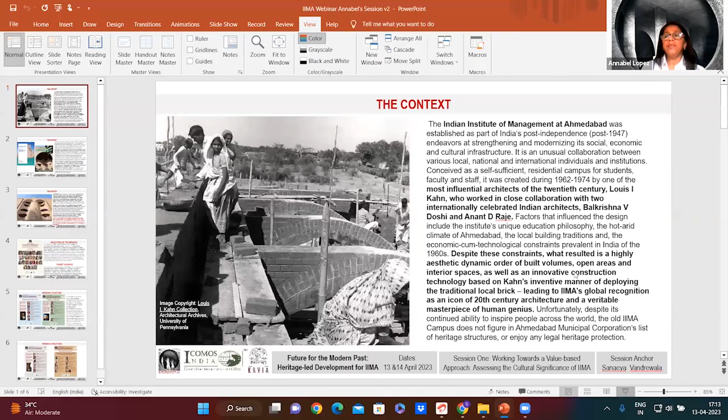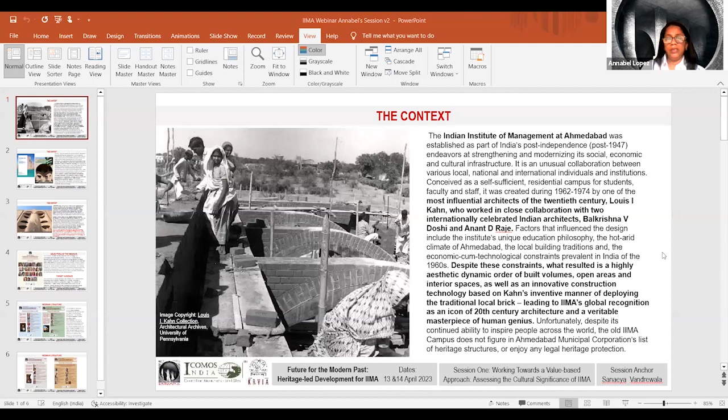First, just a little bit about IIM Ahmedabad. The Indian Institute of Management at Ahmedabad was established as part of India's post-independence endeavors at strengthening and modernizing its social, economic, and cultural infrastructure. It was designed from 1962 to 1974 by one of the most influential architects of the 20th century, Louis Kahn, who worked in close collaboration with two celebrated Indian architects, B.V. Doshi and Anant Raje. Despite the multiple constraints they faced, IIM Ahmedabad today is recognized as an icon of 20th century architecture and is a veritable masterpiece of human genius.

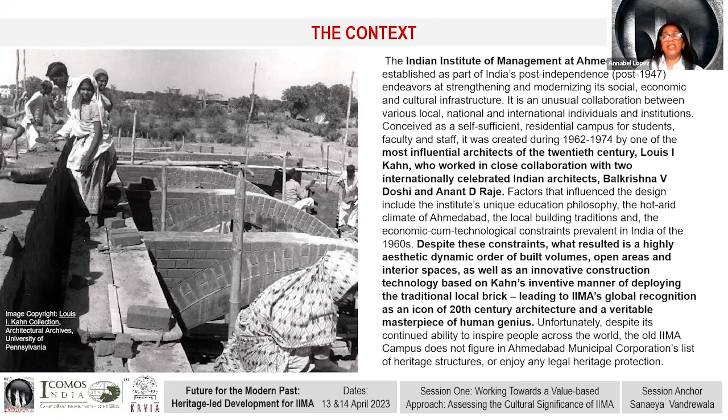However, despite this iconic status, the campus, unfortunately, is not legally protected as heritage. Over the years, the old exposed brick, in fact the reinforced brick buildings, have begun to show signs of decay. A conservation and rehabilitation program, which was taken up by the management in 2016, was abandoned sometime in 2020.

When the IIM authorities decided to demolish and replace most of the 14 dormitories with new student housing, ICOMOS, alarmed by this development, issued a worldwide heritage alert, prepared by ISC20C ICOMOS India, to ask for the preparation of a comprehensive conservation management plan for the campus. There were a number of protests from across the world, and finally, on January 1st, 2021, IIMA announced that the demolition plans were deferred.

However, in November 2022, IIM was again in the news when the Board of Governors announced that it had decided not to continue with any further restoration work, opting instead for a reconstruction of the faculty blocks, the classroom complex, and 3 peripheral dorms, with the same exterior facade, a seismically safe structure, and major renovation of the internal space to improve its functionality and to suit the needs of the current users.

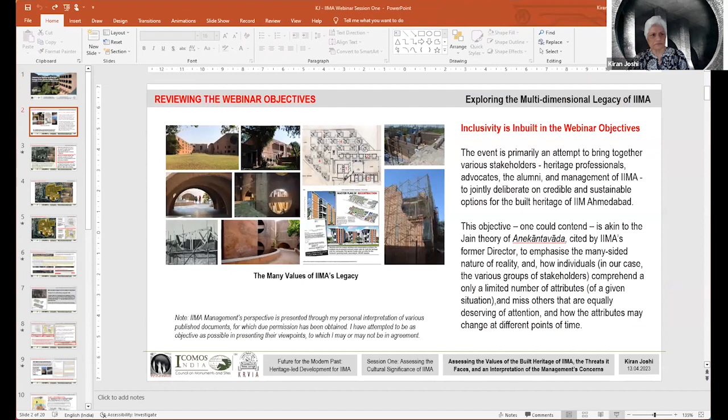To continue with what Annabel talked about, that is the objectives of the webinar. As she's already explained, inclusivity is inbuilt into the whole event. That is how we started. So the event is primarily an attempt to bring together various stakeholders, heritage professionals, advocates, and so on and so forth. But unfortunately for us, despite repeated requests, we did not get any response from the current director of the IIMA.

Errol D'Souza did respond and has very kindly agreed that I present my own interpretation of whatever writings have been put forth by him and sometimes the Board of Governors of the IIM. One of the things I want to point out here is his famous 34-page tract, as he calls it, where he refers to the Jain theory of Anekantavada, which essentially means that every object, every situation has a number of realities, and you cannot just view something from only one angle, so everybody has to get together. I only wanted to point out that the objective of our webinar is very close to what he's trying to promote, that it's very important that everybody gets together, a number of stakeholders offering a variety of viewpoints, sometimes opposing, sometimes conflicting, but it is important that they get together to resolve a difficult situation.

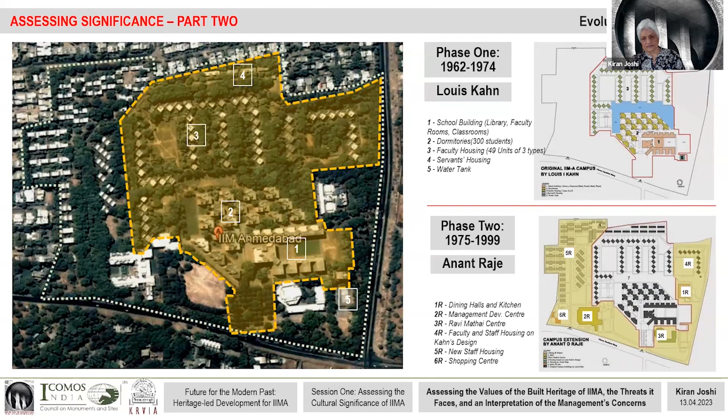The campus, as you know, is generally said to have two components. One is the old campus, designed and built by Louis Kahn during his lifetime. The second part, marked in yellow here, is whatever was built after Kahn's death, between 1975 and 99, under the leadership of Anant Raje.

When we talk about issues of origin and growth, the institute is growing, and in that process certain buildings were demolished. This story goes back to 2019, four years ago. Some of this housing, as you can see in this image, was demolished, and a British architect tweeted about it.

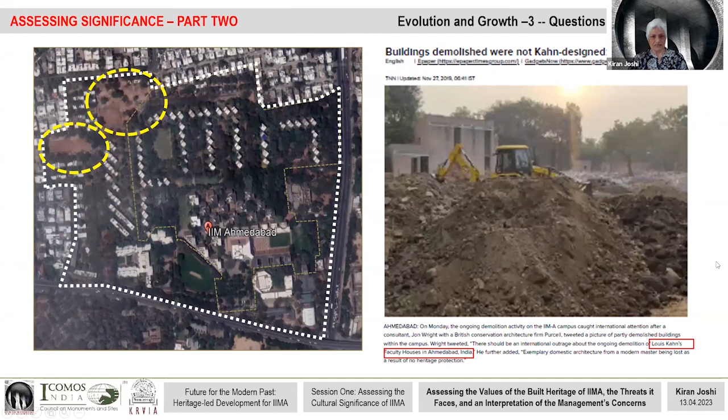He reported an ongoing demolition of Louis Kahn's faculty housing in Ahmedabad. The statement was contradicted by IIM, specifically Professor Errol D'Souza, who said the buildings demolished were not designed by Louis Kahn, but came much later.

So this raises some of our questions. Does the major significance of the IIM rest primarily on its association with Louis Kahn, or are there other ways of looking at it? When we started this webinar, there was lots of discussion of whether we should be looking only at Kahn's work, or also that of Raje. But is that enough? Do we need to look beyond that as well?

That is, the Louis Kahn school building and the student dormitories. As you can see in the plan here, almost all of the remaining buildings of the campus were to be demolished and removed. So this is the area which was built during Kahn's lifetime.

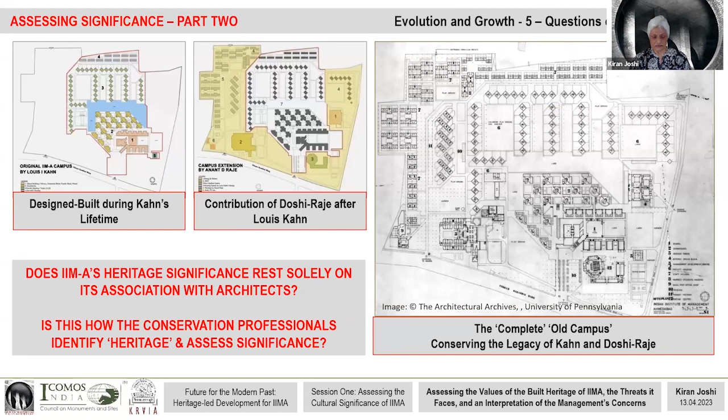Related to this is the question asked by Errol D'Souza in his tract. He says it is pertinent to raise the question: who is the author of the first building? The premise, of course, is based on the fact that it is only the architect, the value of the architect, or how famous the architect is.

That is the only thing which will decide whether or not the campus is significant. And he draws our attention to the fact that it was not just Kahn, but Doshi as well as Raje and other local architects who worked equally on the project. Should then the legacy of the architecture of the building be attributed only to Kahn?

Going on with this, we come to the present year, 2023, and find this question of identity and significance acquires even greater complexity. In this tract, right on the first page, the first section is on the identity of the object. Errol D'Souza traces how buildings have been changed with time, how many parts had to be replaced on account of becoming unserviceable or decaying. There is a huge description of that.

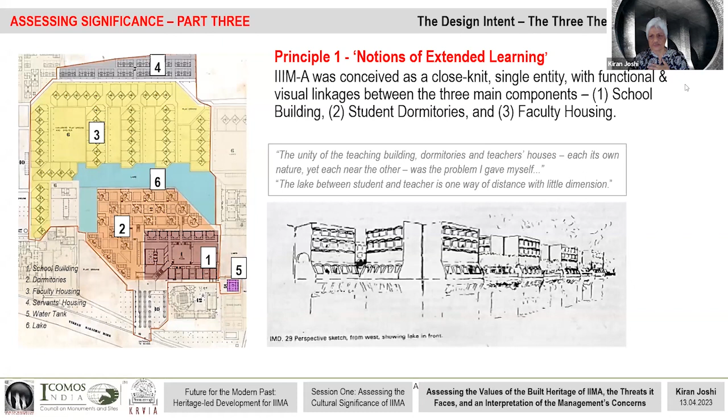The first principle is what he calls the notion of extended learning - that all parts, the student dormitories and the teaching blocks, are linked through a series of corridors, arched corridors, and landscapes. The idea being that students, with the kind of education system promoted at IIMA, would take the dialogue into non-academic spaces as well.

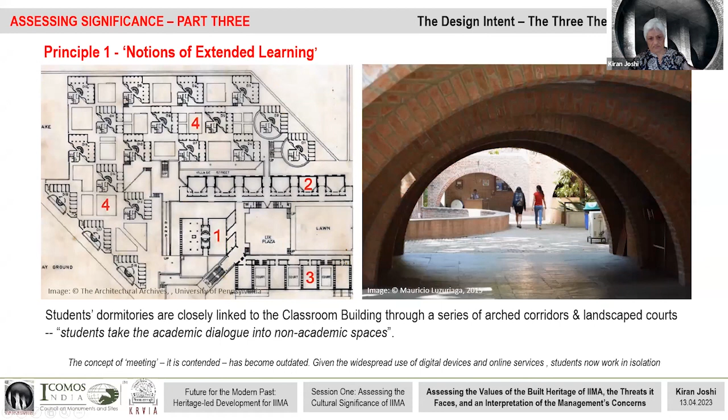However, what I've given below is my conclusion or interpretation of what Errol D'Souza feels about it. He contends that the concept of meeting has become outdated, and therefore the design intent has kind of lost its relevance. Given the widespread use of digital devices and so on, students now prefer to work in isolation.

So the whole idea of meeting and community spaces, to him, while justifying the demolition of this, has been kind of pronounced. The second important thematic principle was that of climate sensibility. The design is based on correct orientation as a response to prevailing sun, heat, wind, light, rain, dust, etc., all of which became the basis for the underlying geometry of the site plan and building design. In fact, after the first site plan was made, a new one was devised to utilize the southwest sea breeze.

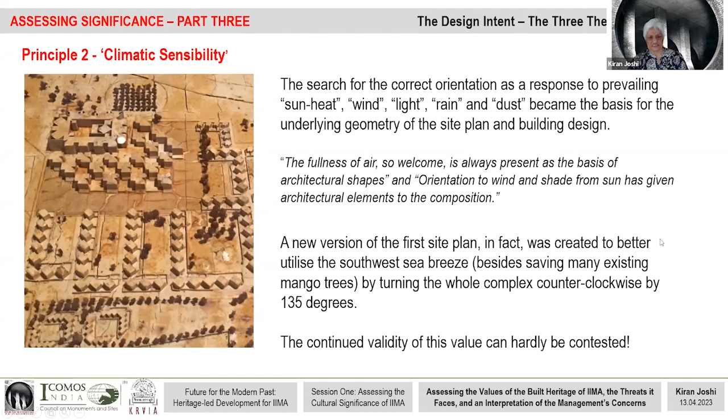The continued validity of this value can hardly be contested, especially today when we are talking about energy saving and sustainability and whatnot. I don't see anyone who could justify that students today prefer to use air conditioners, and therefore this plan is not required.

The third one, and to me the most important one, and the bone of contention, came into play a little after the project had begun. After a while, Kahn decided that instead of using concrete, he would engage only with the locally produced brick at a basic level, extending himself much beyond a mere adoption of the indigenous vocabulary, and invent a unique structural and visual grammar that is now recognized as being of outstanding value.

More would be talked about this by Amit, and much of what I've learned is through his thesis project - throughout the thesis dissertation, the PhD dissertation, throughout the project, we know that Kahn was to remain committed to a reassembly of these traditional components and aesthetics. Some images here show how Kahn's decision to build exclusively in brick generated a new vocabulary, how he reinterpreted tradition, and so on and so forth.

The humble handmade brick became the focal point of the entire thing. And ironically, this very unique attribute, and to me the most fascinating one, because it is less talked about than all the other attributes of this place, has also become its bane.

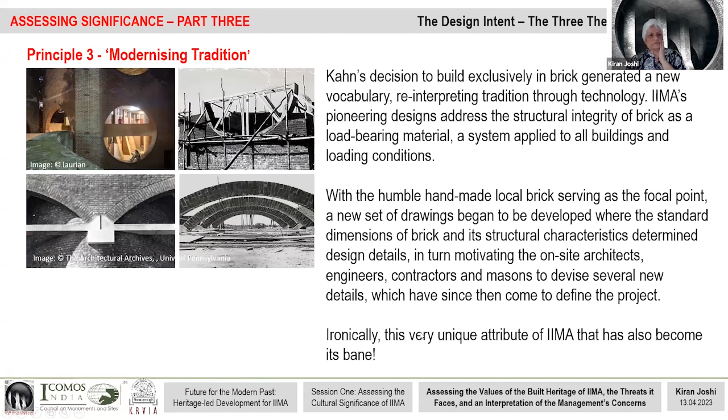A little bit on why I call it that - it's not exactly significance, maybe it is, kind of, and we are talking also about the threats that are posed. So the major cause of degradation, this is deduced not only from the conservation architects' reports, the reports submitted by IIT Roorkee, who were commissioned, and also from other sources.

The major causes are inherent defects in original material and construction techniques, which is considered very serious, and of course faulty repair methods and the lack of routine maintenance. The other signs of decay are rising damp, seepage of water, damaged pointing, absence of casing, and so on, which will be tackled later on as well, so I won't go into this in detail.

What is important here is that while the conservation efforts are reported to be largely satisfactory, the IIT Roorkee report also says that even the restored buildings have begun to show fresh areas of distress and decay. Since the inherent defects in the original material and techniques are quite serious, it seems, from the reports - one doesn't know - this is really a cause of concern. So the question I ask is: how does one contend with the decay of a seemingly unrepairable construction, but one that represents a major value of the built heritage of IIMA?

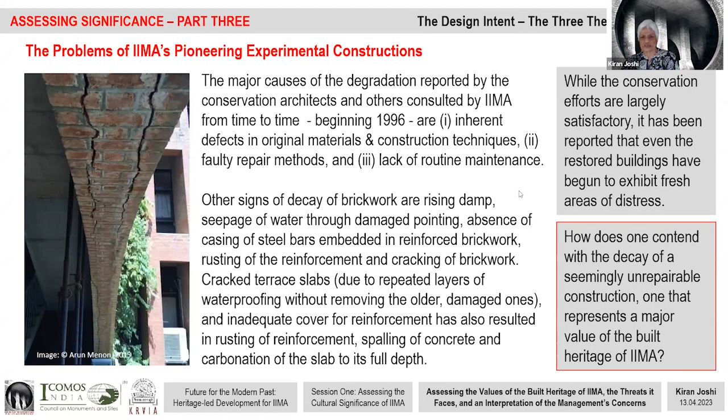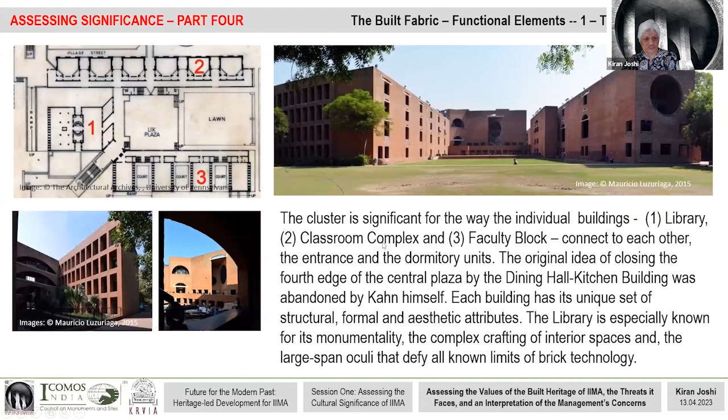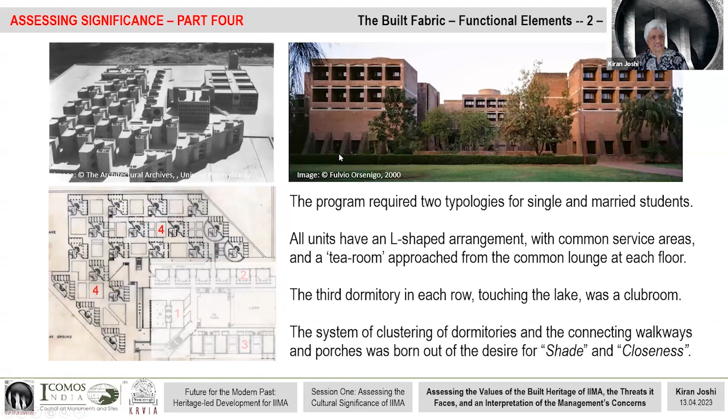Part 4 of assessing significance covers the functional elements of the building, three major elements: the classroom block comprising the library, classrooms, faculty block, etc., and its characteristics; second, the dormitories, admittedly the best part of the whole thing, and why a particular design was adopted, its significance, form, and the concept behind it; and finally, the faculty houses and staff houses, all sharing a plan based on the structural adequacy of brick, economy, and climate.

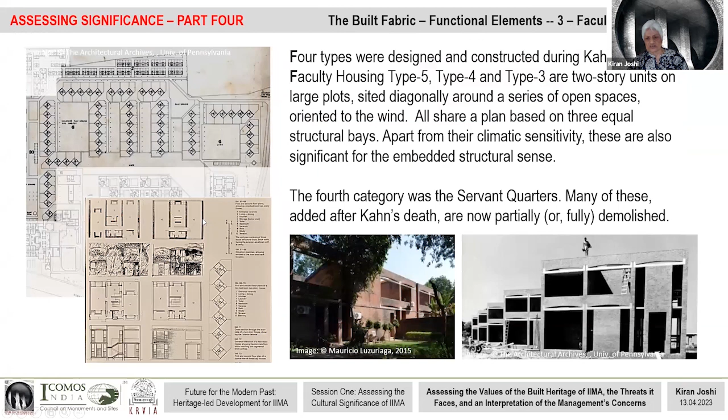Now I come to part 5, which has taken me much more time than anything else, because it meant going through all the documents I could find. Three minutes left, Kiran. Yeah, and this is the last slide.

So last but one: when we talk about the management's concerns, which I'm addressing on their behalf, I could only find three aspects. One was their concern for providing a safe environment for users, born out of the feeling that the residual life of the buildings is over, rehabilitation is not possible, and anything can fall and injure people. Therefore a building must be safe, provide a healthy work and stay environment, and be free from exposure to hazards.

The second is that the buildings have become functionally obsolete, and since they can't be upgraded, new buildings are needed to meet current living and learning standards. He also says he thinks conservation architects only talk about aesthetics and going back to the origin, but a building is a lived-in object, and it's incorrect to reduce it merely to its aesthetic and historical value. There is also a brief mention of shortage of land for further expansion, which to him justifies that existing buildings can be demolished.

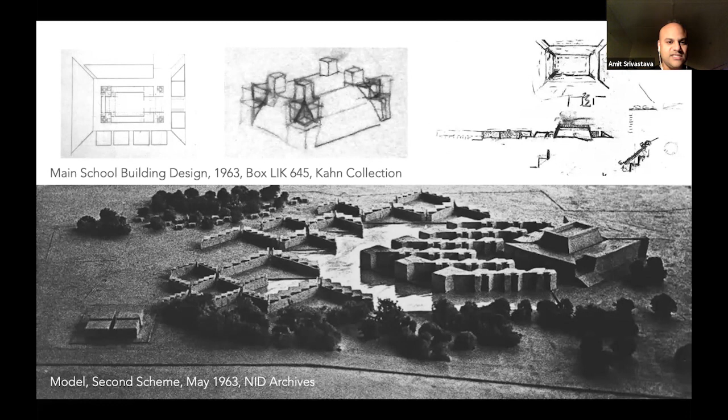It was not until the members from the NID team who actually went to Philadelphia in late 1963 that the transformation happens, and Louis Kahn sort of changes and accepts the fact that he's going to build in the local material of brick. So the agency of these people from the NID team is an important one to consider in the development of that.

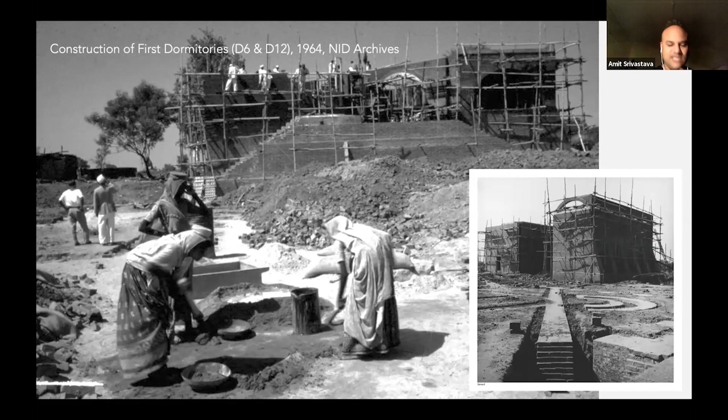In fact, when the construction began for the first dormitories in 1964, Louis Kahn was not in India, and these were done on the details that were developed by the NID team here.

I'm not going to get into detail of that, but it's an interesting one to see, because even today, if you go and look at the D6 and D12 dormitories, which were the first dormitories to build, you can see that the bonding pattern is different than the other dormitories. It sort of is a very important part of finding out that history of transition that happened within the development of the team, and the knowledge transfer that happened between Louis Kahn, Philadelphia office, and the development of the team at NID.

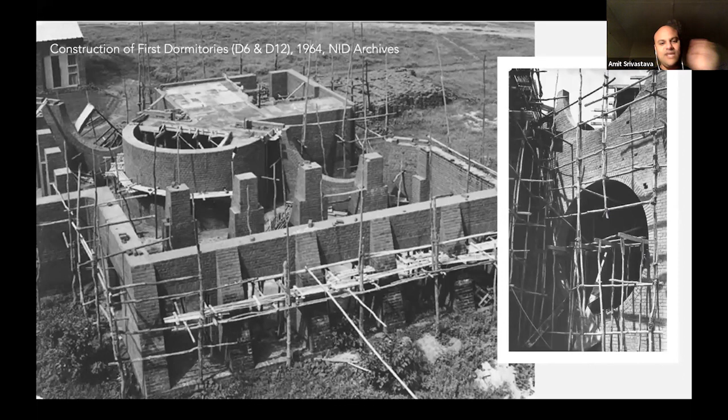And I particularly want to focus on this particular instance, which is in December 1964, Louis Kahn comes to Ahmedabad, and there's this entire discussion about the architectural construction process. And they are involved in the production of this thing, which was called the experimental arch. If you go down into the campus, this still exists.

And the whole idea was to go back to the basics and reconsider brick as a material, understand it not as an imposition of Louis Kahn's idea, but as something that was developing with the capacity of the masons, the bricklayers, the engineers on the site, everybody together.

And this is a very important thing to understand, that IIM in that sense is not just Louis Kahn's creation sitting in Ahmedabad, it's a creation of Ahmedabad, which is directed in certain ways by Louis Kahn. And it transfers the people of Ahmedabad, but also transfers the way Louis Kahn looks at architecture.

So from my perspective, this network of intangible heritage is important, because we're not just seeing this as an imposition of Louis Kahn's design. There's a whole lot of players involved, and all of them bring really important things to it.

I'm not going to get into detailed history, but here, for instance, the NID team is really important, with characters like Satsangi, Sen Kapadia, Narale, Padmakar Karve. They were all involved in developing a complete new drawing convention, unlike anything Kahn's Philadelphia office was doing, and different from what Doshi's office was doing. This entire process was developed in conversation with Louis Kahn, but it defined the way the project developed.

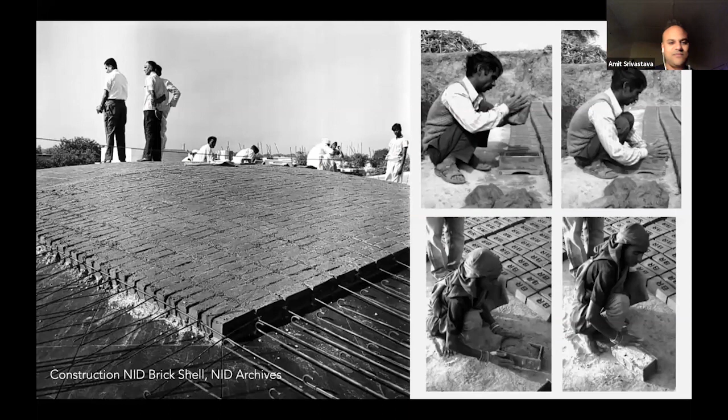And if you go today you can see this fabulous brick shell structure at NID, which was actually developed in collaboration with some of the same bricklayers who were working on the IIM project.

On the broader framework of Ahmedabad's development, if you look through the records of the Ahmedabad Brickmakers Association, 45 new brickmakers emerged in that 2 to 3 year period, with new kilns in Wadaj, Ghatlodia, Chandlodia, Bhat, all sorts of places. So it's a transformation of the entire city happening on the basis of this project—its roots extend all the way out throughout the building culture of Ahmedabad.

For my colleagues who might talk in the next session about the design legacy of Kahn, it's easy to see that after Kahn does this project and goes back, over the next couple of years he designs the Ayub Hospital, the Dominican Mother's House, the Fine Arts project in Fort Wayne. All of these have a direct reference to what he's been doing in Ahmedabad.

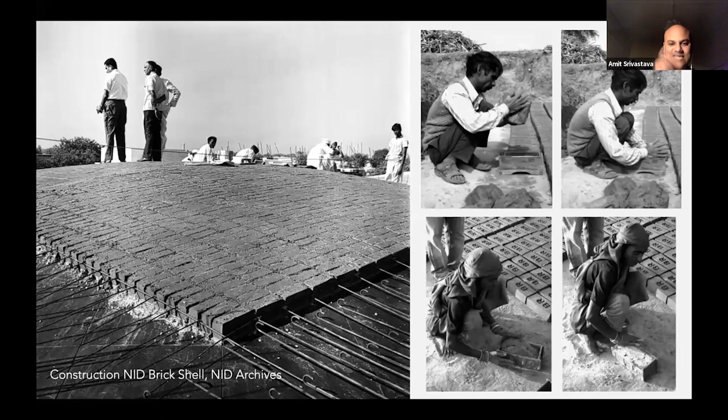The interesting thing is that for at least a couple of those projects, he sends the drawings to Ahmedabad for the NID team to look at and sort out the details before it's sent back. So not only is the impact happening on the building culture in Ahmedabad, it is also starting to affect Louis Kahn's future work.

As we are aware, the idea of looking at the IIM project is Louis Kahn working with the NID team and with people from Doshi's office to build a capacity, a way of thinking about materials of construction—but not in the sense that Louis Kahn is coming in and dictating that idea based on his own practice. He's coming in and developing that with the people here, which I think is important to consider in understanding how deeply this project is embedded into the building culture of Ahmedabad.

So getting to the issue of intangible heritage, the idea is that intangible heritage is both physical and associational. If you pay attention to the narratives through these stories and memories which we try to capture, there are invaluable insights into the psychological bonds that these people have with these places, and that also tends to define the heritage value. So in that sense, IIMA is not just the building structure itself, but the narrative that links it to Ahmedabad's building culture.

Speaking of narrative, there is a second really important implication of this project I want to highlight, and since I have limited time, I'm going to go through this quickly.

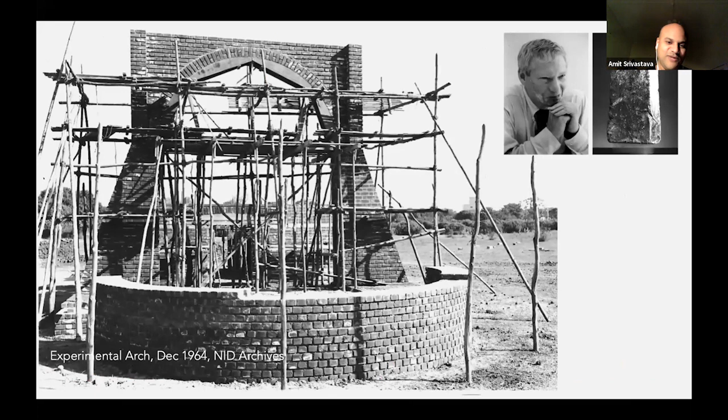Going back to the experimental arch, there's a very interesting, famous dialogue between Louis Kahn and the brick, familiar to anybody who's been in architecture school. Kahn asks the brick what it wants, and the brick, being recalcitrant, says, 'I want an arch,' even though Kahn wants to make a concrete lintel over it.

People have used this within architectural education for many years as a metaphor to understand how we use materials. But over time we've recognized that Kahn was communicating something else about the entire construction and building process. This idea of the recalcitrant object is an argument against hylomorphism, a way of thinking about how we deal with objects in construction.

Interestingly, in the same year that Louis Kahn supposedly has this dialogue with the brick, Gilbert Simondon is writing about the same idea against hylomorphism in his book, and he also talks about brick making and bricklaying as a way of understanding this relationship with the object world.

It's not until the 1990s that people like Bruno Latour start arguing that there is an agency of the material that is revealed in the process of making, and he starts talking about reinstating that symmetry of humans and non-humans.

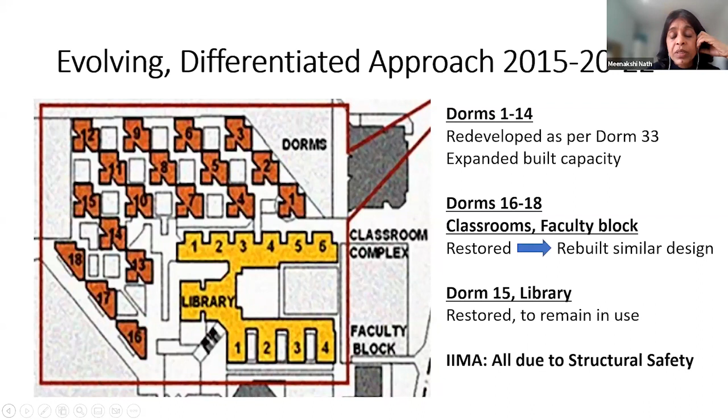This is where I think the differential values come in, because external facing, we all alumni love iconic Louis Kahn Plaza for the venue it offers our grand events like conventions, etc. But actually what links us to each other and back to the campus is the dormitories. People will come to reunions if dorm mates are coming and won't come if they're not.

These are the people who have linked us to better careers, linked us in life, given us friendship. So even at a reunion as recently as December, a 10-year reunion, around 60-70% of the people who turned up were from the old campus and only 30% from the new campus, even though roughly similar numbers of students study in both.

So we value both the inner core as well as the external facing. And actually, so do new students, the current students, and Rashmi is going to talk about that in her presentation. The other differentiation is functional benefits, like toilets, etc., whereas students value the inspiring architecture, because Rashmi and I had done a survey of 103 students in 2021, and she's going to talk about it.

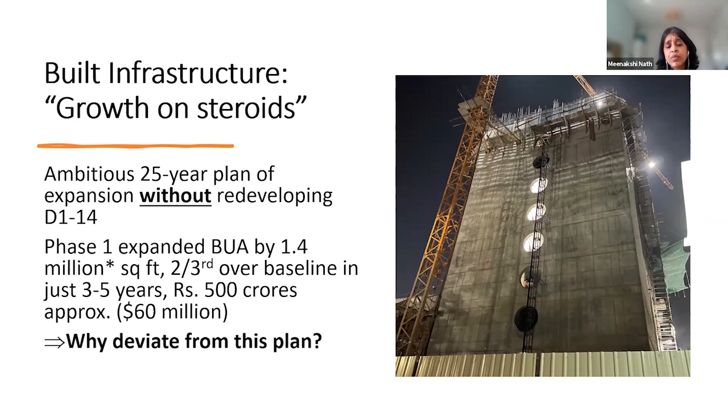Just to give you context on what's happening on the built infrastructure side in Ahmedabad, most of you are aware that HCP Design was the master architect for IIMA, and they've made a 25-year plan of very ambitious expansion, going from 1,000 to 2,000 students without actually redeveloping Dorm 1 to 14. So why do we have to do it? Why are we deviating from this plan, which has already delivered 1.4 million square feet additional in just one phase, and 4 phases still remain?

Now, just a very small point on IIMA governance. It's autonomous, which is great, but the governing council has nominees that are selected by the governing council themselves. So it's self-selecting, and they're not really representatives of the alumni or faculty. There are limited mechanisms, even though they're government owned, to be held accountable, really, because they're autonomous. They do come under the Right to Information Act, so eventually all the information that underpins these decisions will come out. It's really very important upon IIMA, as a custodian of this architecture, to be really scrupulous and very transparent in its decision making.

I'm not going to talk about this, and our submissions are that it's an irrevocable loss. Dorms are integral to our pedagogical philosophy, which is focused on group work, case work, etc. And students are valuing the inspiring role that the architecture is playing in their residential experience there.

Alumni can bring in a lot of expertise. Usually, institutions look at alumni mainly for funds, but actually as management experts, civil engineers who are also MBAs, we can bring in a lot of expertise. There's a lot of convening value. So please use us.

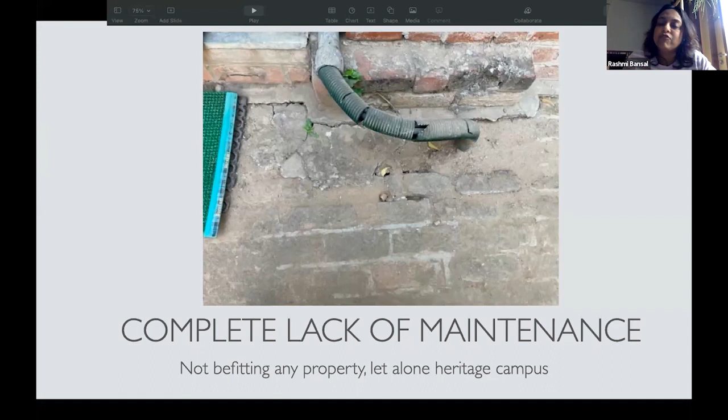But as such, the structure looked pretty wonderfully strong, and it didn't feel any different from what we experienced 3 decades ago. But we did want to speak to the students and ask their views, like do they really want these OYO room kind of hostels now, because we were told that that's what students want.

They're paying so much money and that's what they deserve, because apparently in ISB that's the kind of housing they get, and that's the need of the hour, there's a demand from the students. So we did go and speak to more than 100 students.

First of all, we went to dorm 15 and spoke to the students there, because that was the one dormitory which was completely renovated. And the students said that actually we're really happy with the renovation. And of course, yes, we do have shared bathrooms, but they're good and we don't have any problem with that, and we're satisfied with the whole experience. So that was something very heartening.

I think 60% of the students said, look, maybe it might be nicer with attached bathrooms, but if that's going to come at the cost of demolishing the entire old campus, then no, we don't want that. If I had to sum up more than 100 responses, they said the work done by Louis Kahn is amazing and so unique and important to IIM Ahmedabad, we should not demolish it. All we are asking for is better facilities, like air conditioners.

It is very possible to retrofit these dorms with air conditioning. In fact, dorm 15, when it was renovated, had a provision for adding an air conditioner. All over the world there are buildings 200, 300 years old that are upgraded and renovated with heating and modern plumbing. So it's not that it cannot be done, and that provision was made in dorm 15. So I think it's very wrong to say students are demanding this and therefore we are making this decision.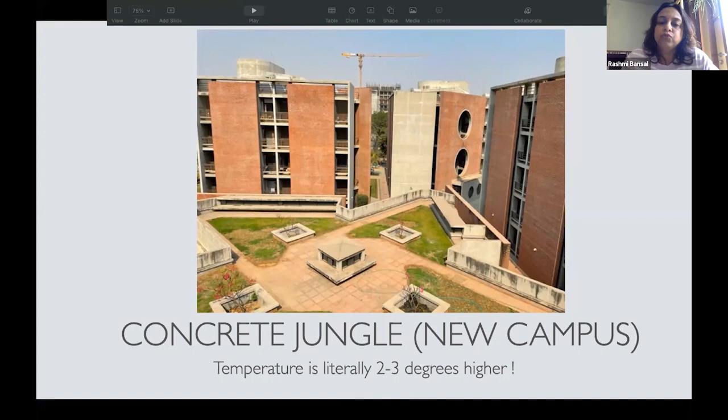This was just not possible in the old dorms. Your identity was linked with your dorm. Even today people say, I'm from dorm 13, I'm from dorm 14, and we find that kind of strong bonding with the dorms. I agree times have changed, people are more online, chatting, on text. But as educators, our responsibility is to design spaces which create more interaction, because apart from what you learn and the degree you carry, it's the network and bonding with fellow students that is the most important asset to gain from this 2-year experience at IIM Ahmedabad.

In the passageway that links the old and new campus, there's a nice poster with a quote by Louis Kahn, with his picture, saying he wanted to create unity between the teaching building, dormitories, and teachers' houses - the problem he gave himself to solve. But it looks like this whole concept of unity doesn't seem to matter anymore to the current dispensation.

In that case, the only thing we'll be left with is these kinds of posters, and instead of having living history, we'll just have memories on paper that there used to be this space and now it doesn't exist anymore, which would be a real shame. We do think as alumni that where there is a will, there is a way, and the Louis Kahn designed campus should be restored as a whole - that should be the goal, not piecemeal, keeping just the LK Plaza because it's good for convocation photos. Because once we remove the dorms and put some other ugly structure there, most likely like dorm 33, it's going to have no unity, no meaning. They may as well just remove everything.

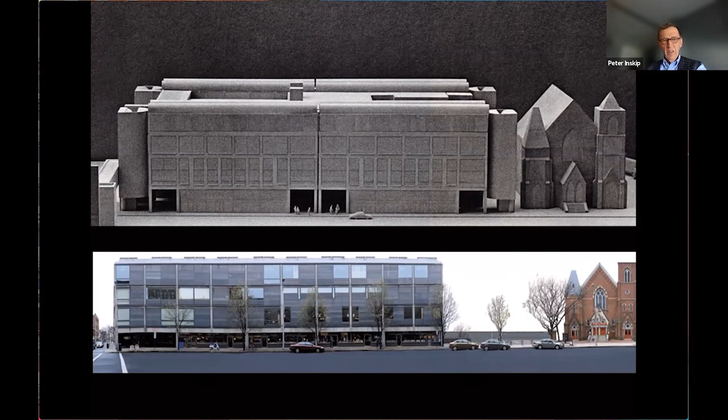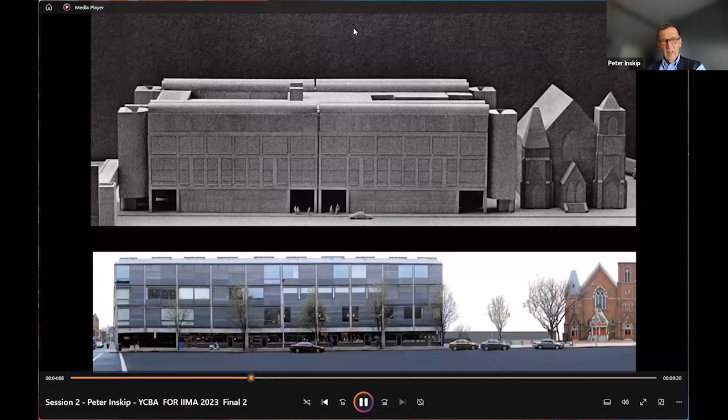However, it was too ambitious, and Mr. Mellon's lawyer was clear that it was beyond the available resources. The revised project was more modest and pulled back the building, disengaging the church with a new external lower court.

The building was structured around two courts, set deep in the plan. The portico cut through the commercial band that faced the streets, opening to the quadruple height entrance court. Steel panels demarcate the rear of the outward-facing shops. Oak millwork screens house the three floors of galleries above, and openings allow views onto those exhibition spaces.

The library court rises from the second floor, its blind millwork walls screening the study rooms and rare book libraries, but opening on the top floor to the top-lit galleries that extend over the whole of the fourth floor. The hanging of the two large paintings by Stubbs is suggested in some of Kahn's sketches, but generally paintings were not destined to be site-specific.

The approach, however, was definitely sympathetic to Mellon's idea of the English country house. In the galleries, materials are all neutral: poured concrete, travertine, oak millwork, Hessian, and natural wool carpets. Views over the entrance court to other galleries located the visitor within the building and countered museum fatigue.

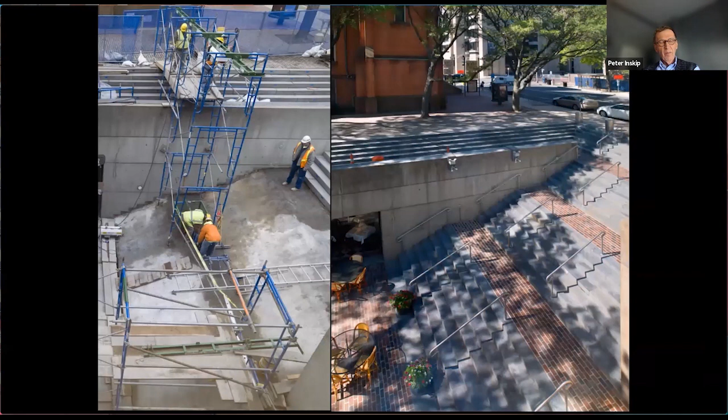Whilst conservation plans are concerned with significance, physical condition cannot be ignored. In contrast to projects in India, the centre was constructed by one of the great construction companies of America, but of course there were still building defects. The monumental stair down to the lower court was found to be moving due to the failure of its reinforcement, and it had to be rebuilt on a new slab.

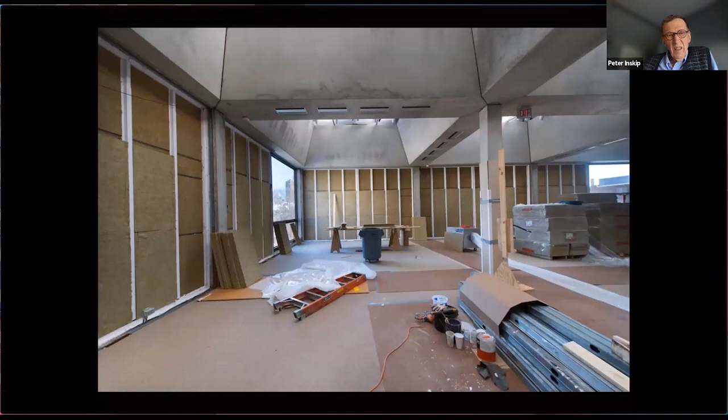Similarly, penetration of water through the external envelope had corroded fixings, and moisture was entering the galleries. These had to be stripped out and repaired to eliminate the problem.

After 30 years, some upgrades to meet current building codes were certainly needed for fire safety requirements and improving attitudes to accessibility. The access to the auditorium was indeed a nightmare, without any handrails to the steeply raking steps, and people with disabilities had to go through back-of-house areas, and there was no accommodation for carers.

But there was also what the staff at the centre identified as drift, and by that one means drift away from Kahn's late architectural philosophy. Small changes, but accumulatively they were having a big impact on the cultural significance of the building.

The galleries had been very carefully designed by Kahn, and details such as daylighting had been developed on the basis of full-size mock-ups off-site, but using works of art from the collection. Both Kahn and Mellon believed in experiencing paintings in changing daylight conditions, and for the donor that represented an important element of the domesticity of the installation.

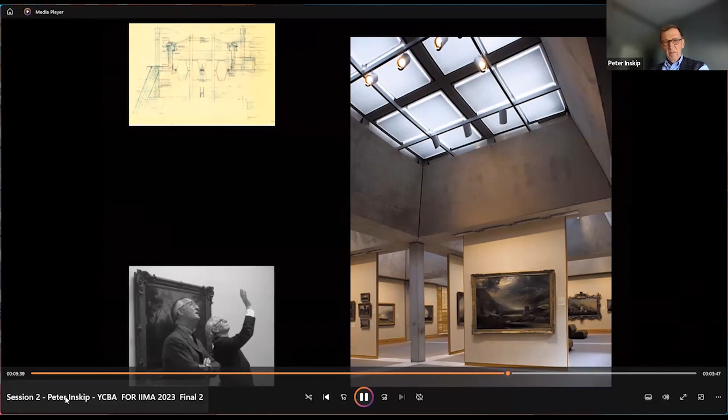J.M.W. Turner's great painting, The Dort, was the centrepiece of an exhibition at the Royal Academy in London to mark the centenary of Paul Mellon's birth, and it was received with great acclaim.

But the painting was something quite different when seen within the gallery designed by Kahn: the changing light, the natural materials, the calm of the setting, and the relationship to the window with its view out over the city.

Over the years, there had been attempts to improve the galleries, particularly with temporary exhibitions. Blue damask was introduced as a background for some 18th century portraits. Walls extending the full width of the bay replaced the use of pogos in some exhibitions, and experiments in artificial lighting using small apologetic fittings replaced the larger downlighter cans that Kahn considered integral to the building.

Serious drift also occurred with closing off the views into the galleries from the entrance court. The openings were treated from the court as if the blinds had been drawn down and closed within the galleries with sheetrock panels to gain additional display space, losing a terribly important idea of this expansion of space and being able to see your destination when you came into the hall.

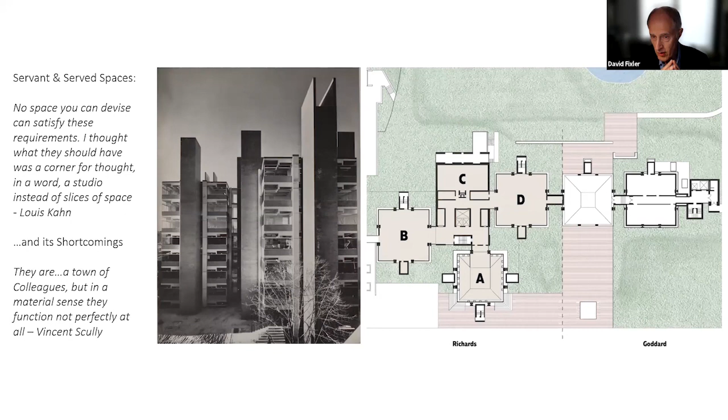The two towers off to the right are the Goddard Laboratories, which were not part of the project that we were involved in, so I'm not going to talk about those.

One of the things fundamental to us was going back through the archives, figuring out Kahn's original notion for the building, and discovering how, in fact, these laboratories were meant to function from the standpoint of the design of the building.

It's also important to note that this is Kahn's first encounter with structural engineer August Komendant, with whom he subsequently did most of his work.

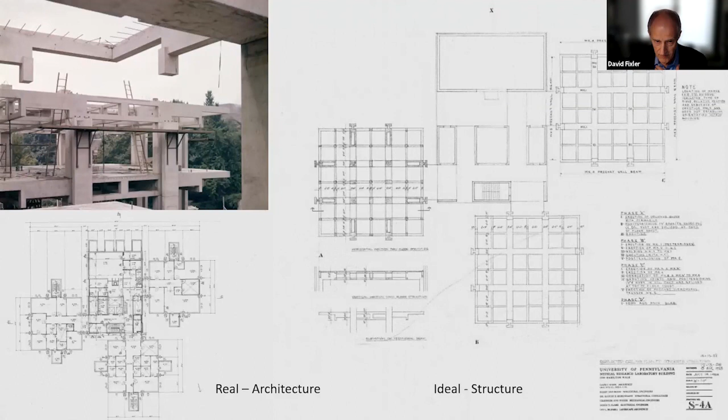However, if you look again at the three glazed towers, this was never something that really jived entirely with Kahn's vision as to how the lab should work. And frankly, it never worked terribly well for the scientists themselves.

So here is a series of diagrams that show how, in fact, these services were run. He was very, very concerned and did these very poetic sketches, which I don't unfortunately have time to show, about how the HVAC systems would gang together and sort of create the lungs that enabled this laboratory building to breathe. He took that very literally.

But what he did do was go through on the drawings and identify each of these services, which you see on the drawing on the right, and how they stack one above the other within the Vierendeel frame system that holds the building together.

The idea is that the Vierendeel frames - this is the second time he's used it, but it's the first time he's using it with Komendant - accommodate the services running above this 8'6" plane of the bottom of the structure.

It's very important to recognize from, you can see it from this photo, the large windows in the distance and in the corner to the left. There is what we came to call the sacred space between the window sill and the head, so that all of the services either feed down and stop at the trusses, or they feed up and stop at a level below that datum for where the window is, so that you get this clear space when it is possible.

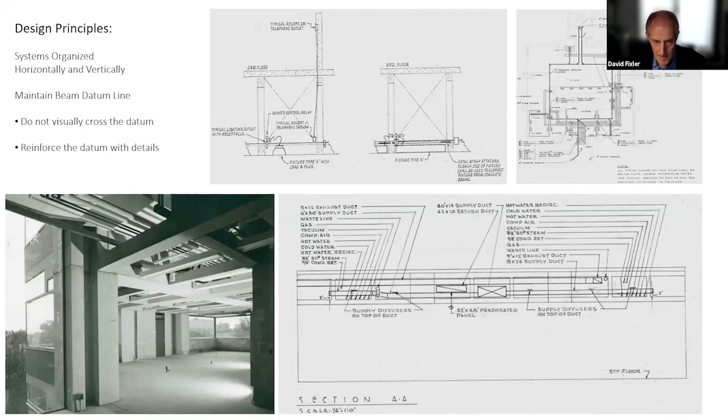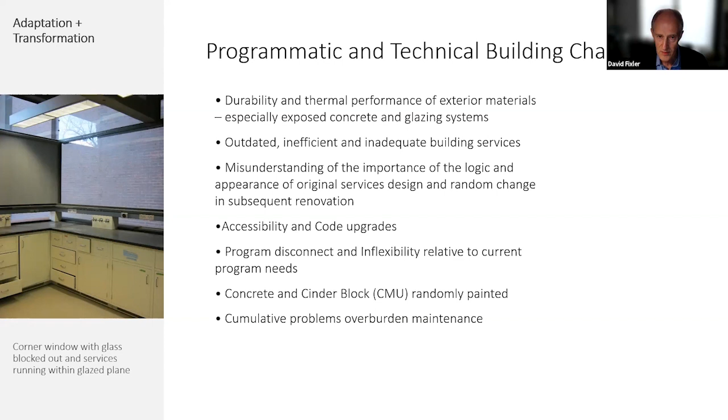So the photo on the left just gives you an idea as to how these laboratories evolved in an ad hoc fashion over the years, and in a way that really, in many cases, fought with the building rather than try to accommodate it. So I'm going to talk first a little bit about the glazing.

These are quite monumental lights. They're 14.5 feet wide by 5.5 feet tall. And they were just 1/4-inch plate glass, which is a beautiful material, but one which no longer meets any kind of wind or seismic code and presents a major safety hazard, as well as being very energy inefficient. However, he did devise this gorgeous stainless steel frame, this very, very elegant stainless steel framing system, which we did a lot of research on.

This is actually the second generation of a continuous evolution that Kahn explores with the idea of bent stainless steel plate, right up to the Yale Art Gallery that Peter just showed you in his wonderful presentation. It was very much present in that. It's in Kimbell, it's in Exeter, it's in most of the buildings he did in America.

So in order to try to improve the energy performance of this - because it's important to understand that this is a project that was funded by the university through basically an energy improvement fund - we had to make every effort we possibly could to make the building more sustainable.

So what we came to for the glass was to use a high performance laminated glass. It's still monolithic in that there is no gap. The laminated glass enables you to provide safety, a little bit better energy performance, and very important though, with lights of this size, it enables the flatness that is so much a character defining feature of this glass and of the exterior of the building.

Then we got very aggressive with the HVAC system and introduced a chilled beam system. It's the first time they used it at the University of Pennsylvania, which was much more energy efficient than the traditional variable air volume system that one might normally have used.

And the reason we could do this in many ways was, A, because we are tightening up the exterior of the envelope, but B, because we are transforming the building now from a wet laboratory to a center for cognitive neurosciences, which is very computer intensive, but not air intensive. So we could use a much more efficient system - the amount of air change required could be accommodated by a chilled beam system, which normally is a tough thing to use in a laboratory.

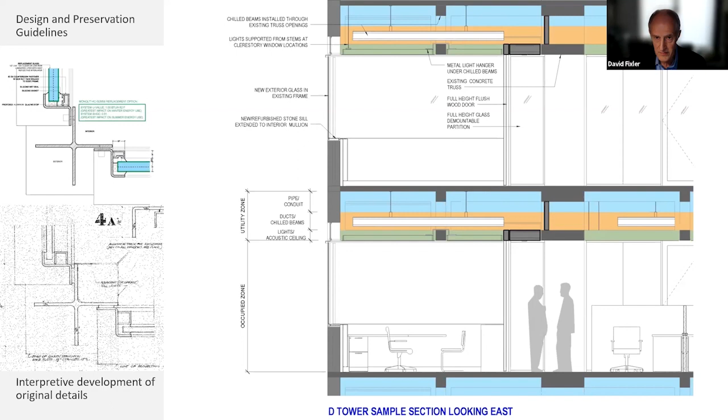In order to make this work, we had to more evenly and equitably distribute the office space. We identified a system whereby Kahn had really figured out a way to move off-grid where necessary in order to locate partitions in the most optimal place.

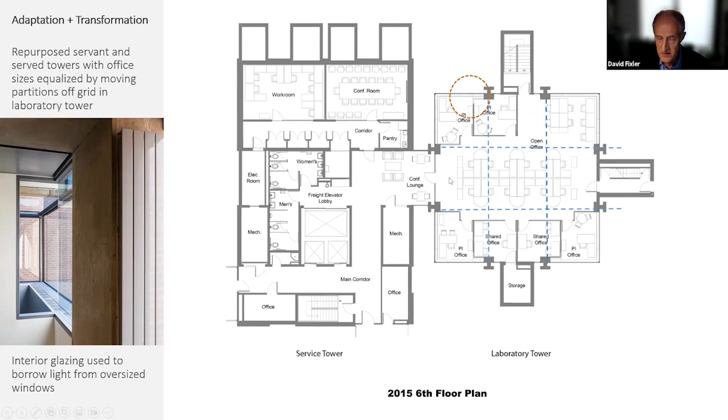Another piece we felt was absolutely critical was that one corner remain open on any of these floors, so that when you come into the suite, you get the sense of the expanse of the space that Kahn originally wanted.

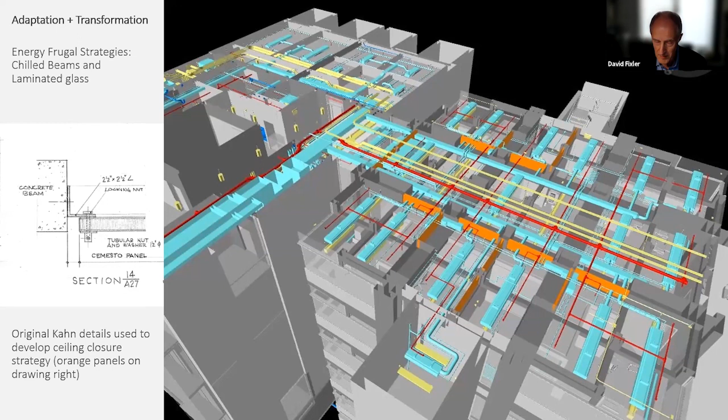Here you see how we made this all work in terms of the distribution of services. The detail on the left is the off-grid offset panel design that Kahn initially utilized just in storage areas, but we made it part of the greater scheme.

We did a light touch conserving the concrete, except where the paint had to be stripped, and now there's this wonderful luminous quality about it. We also introduced this shroud, which created a found space - what used to be storage - at the entrance, making a more gracious entrance to each laboratory suite and providing extra meeting or lounge area.

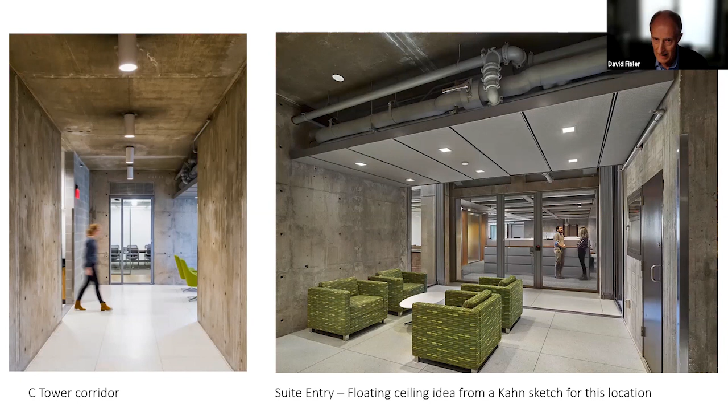This idea of the shroud concealing the systems was another sketch idea Kahn had proposed for the building that was never executed. We adapted it into something contemporary to house lights and control the riot of systems that run above.

Here are the views from one tower to the next. Again, this idea of the expansion of space and being able to see from one tower to the next was something that was never realized in the original scheme, but now with the repurposing of the program, we were able to do that. Again, light touches in these areas like around the entry and the transitions.

And here is the space now fully furnished. And so with that, I wrote up a little piece on adaptability and transformation, because this is a case where if we had tried to be too literal about use value, the building was stuck. There were people who called this building the worst laboratory ever designed, and it really never met its original goal. But since it has become the Center for Cognitive Neurosciences, opened about 6 or 7 years ago, to all we hear, it's been working very well, and we have finally found a proper accommodation between Kahn's original idea, the heritage fabric of the exterior of the building and the concrete, and a workable program to carry this building forward.

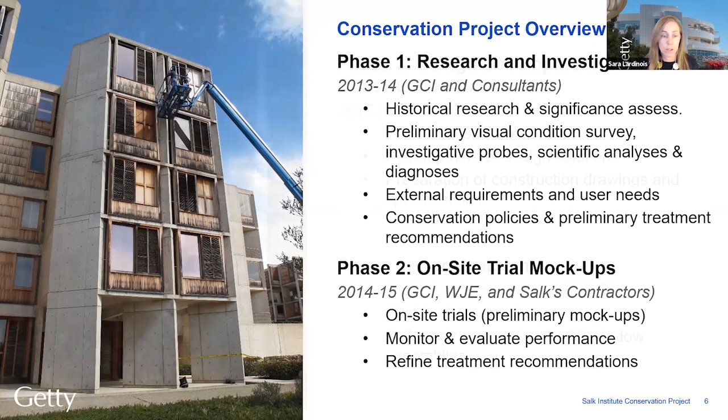Drawing upon the results of the GCI's earlier research and the trial mock-ups, WJE fully developed the conservation treatment of the window walls and prepared construction documents, including detailed drawings and specifications in phase 3. This was all the basis of the fourth phase of work, the implementation or construction phase.

This entire process, while new to Salk, was immediately familiar to them because it echoes the scientific research processes which take place within their own laboratories, particularly the trial mock-ups being equated to trials you might do for medical development of cures for medical issues. So I will now share with you some of the work and findings of the first two phases of work.

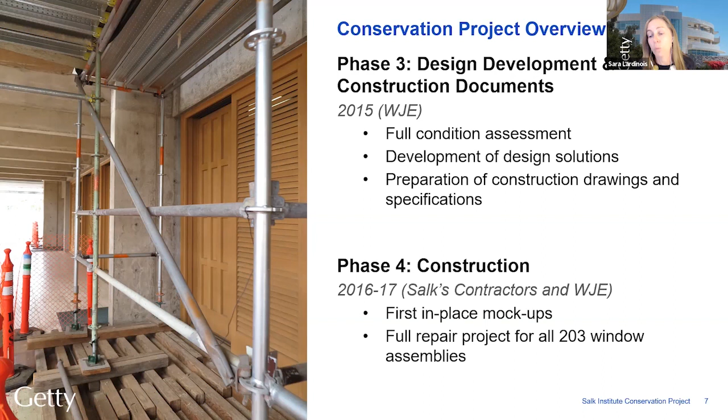While we understood the overall significance of the site, we wanted to look specifically at the significance of the window walls within the context of the larger site. Here is a summary of that assessment, and I wanted to call your attention to some key points. One was that we found the prefabricated window walls to demonstrate a unique synthesis of industry and craft, combining both traditional and modern materials and techniques.

The last point is that these windows are also examples of custom exterior millwork used in Kahn's larger body of work. There are many similarities in use and detailing to residential projects, such as the Korman House and Fisher Houses, and the library at Phillips Exeter Academy.

In fact, we found out that these sites are also experiencing some of the same challenges related to the detailing of the millwork.

An important thing that happened during the project is we worked with Bill Whitaker at the Architectural Archives at Penn to organize a meeting with the owners, stewards, and conservation teams involved in these other sites. It was a great opportunity to share information and to learn about how others were responding to their specific challenges, and if there are lessons that we could learn from them that could be incorporated into our own work, and that hopefully they would learn something from what we shared at the Salk.

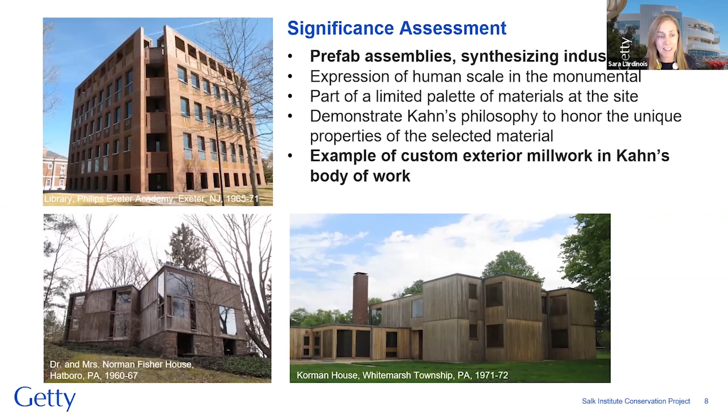These assemblies are incredibly complex with a number of different elements in them, and all of these different elements make different relative contributions to the overall significance of the assembly.

So we set about assessing and grading the different elements of the assemblies, as one would do for a historic site as a whole, to help us understand which are essential to retain and which may be altered or removed if necessary. We found that elements such as the overall prefabricated nature of the assembly and the teak cladding and window sashes were of exceptional significance, while interior stock components such as the wood stud framing were of moderate significance.

Other elements, such as later surface coatings, were found to be intrusive and detracting from the overall significance.

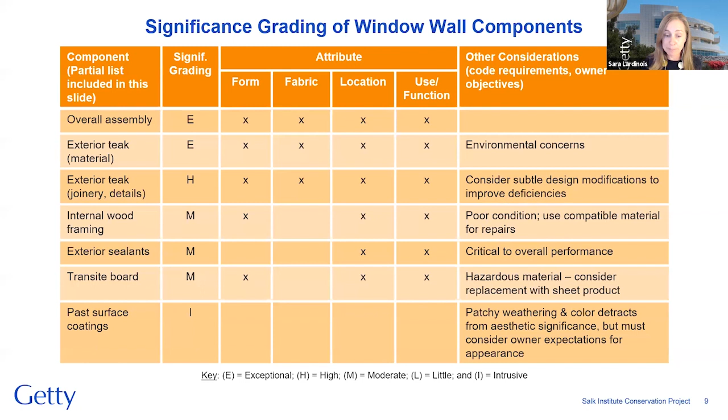This whole exercise also addressed other aspects that needed to be factored into the decision-making process, such as code and owner requirements and the treatment of hazardous materials, such as transite panels, that were in the interior of the wall assemblies.

As part of the preliminary condition assessment, we also opened up two of the window walls to better understand how the walls were assembled and attached to the concrete structure, and also to look at the condition of the internal elements. In the process, we found that the flashings shown on the original design drawings and shop drawings were in fact not installed. We also found significant moisture and termite damage to the internal softwood framing in some locations.

We also spent a lot of time looking at the wood with a wood scientist consultant. We wanted to be sure that we did in fact have teak, because there are a number of other tropical hardwoods that are commonly referred to as teak, and we wanted to understand the characteristics of it so that might inform appropriate treatment and specifications for compatible replacement materials where needed.

The analysis showed that the weathering of the wood varied significantly depending on exposure, but that there was in fact quite a lot of good existing wood in good condition that could be conserved in place.

We also undertook scientific analyses to understand the nature of past surface treatments and also what this troubling black fungus was. It turns out that it likely comes from the surrounding eucalyptus trees and thrives where there is a moisture source. It is not a decay fungus, but more of an aesthetic issue. It is part of the environment in La Jolla, so it's not possible to prevent its growth, but in future phases of the work, we would look at how we might be able to retard its growth by limiting access to moisture or using fungicides.

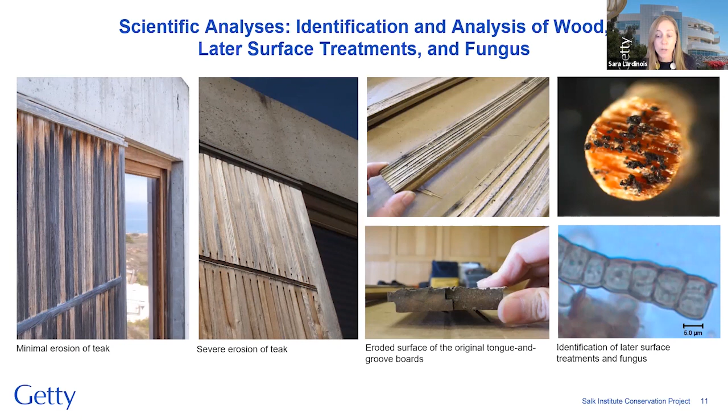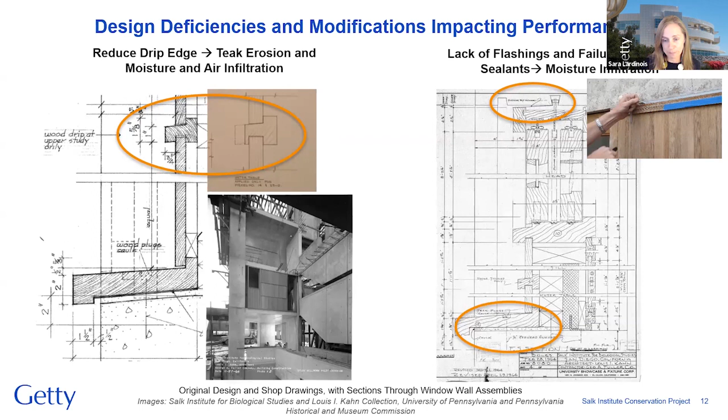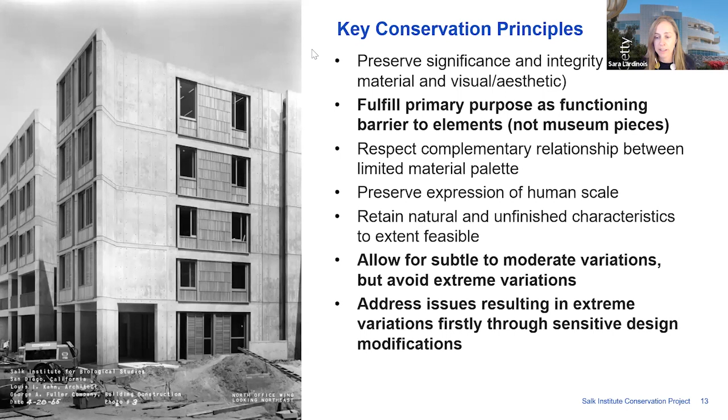Next slide. So these principles guided the development of 3 general treatment typologies to respond to the range of conditions on the site, from minor to major interventions, and that all levels of intervention included cleaning, removal of past surface treatments, and preventive treatments to control termites. These mock-ups helped us better understand which treatments worked, which did not, from an aesthetic, a technical, and logistical point of view, and how the solutions will perform in the short, medium, and long term, and also how well they were able to adhere to the conservation principles.

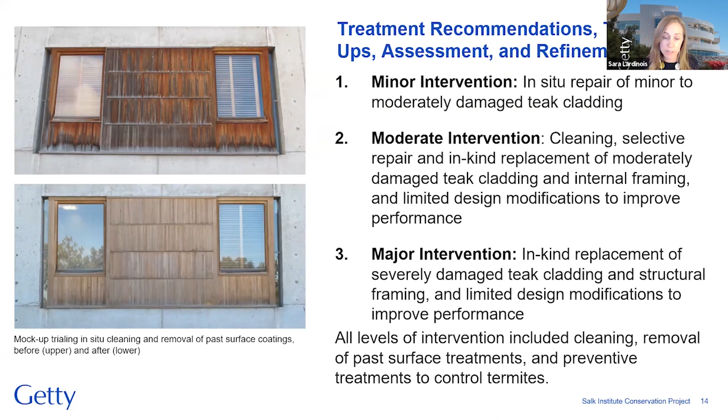3 minutes, Sara. Okay, great.

Next slide. And so some of the key technical challenges that we also looked to develop solutions to during the mock-up phase were, as I previously mentioned, the feasibility of installing flashing and weather barriers where possible to improve performance. Options for sourcing teak where we would need replacement material, including reclaimed and new teak. And options for addressing the fungal biofilm growth, such as modifications to the wood detailing to reduce moisture uptake and application of water repellents and fungicides. And these all informed the refinement of the treatment options in the design and construction phases.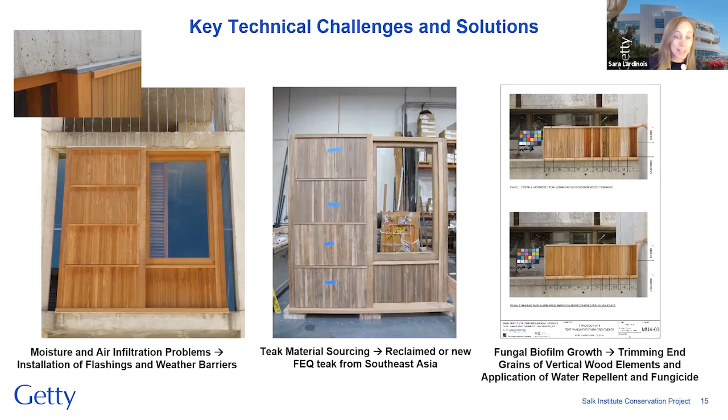So next slide. At the end of the design and construction phase, I'm happy to report that 2/3 of the original teak was able to be conserved in place, which is a far different outcome than the total replacement planned for the site. And the Salk's facility manager, who managed the work and also its ongoing maintenance, estimates that the expected lifespan of these renewed assemblies is 50 to 70 years.

He also has said that the methodology provided to him, which is very logical and transparent, has really given him a good tool for explaining the decision-making process to Salk leadership and other interested stakeholders. And the last slide, please. We are also quite pleased that this methodology has since been applied to other projects on the site. During the teak work, the Salk decided to take advantage of the elaborate scaffolding system in place and to address some of the more urgent concrete repairs. And this was a project that was led by their architectural consultant, Wiss, Janney, Elstner.

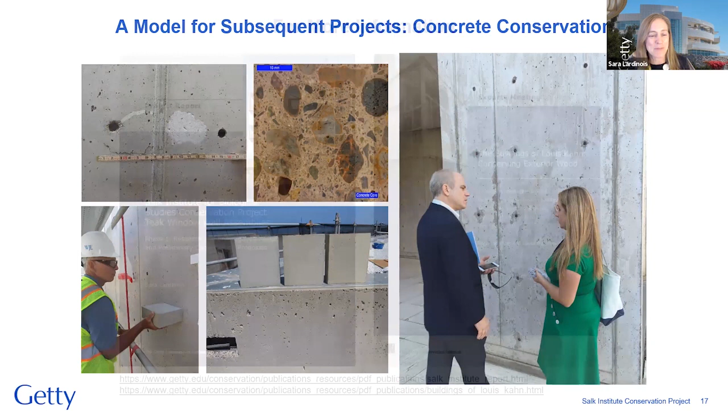And so there is one more slide that just has some sources for additional information about the project. And I'd like to say thanks to all for listening.

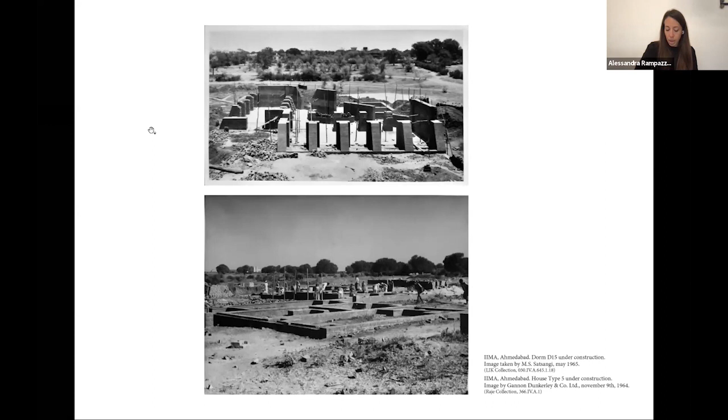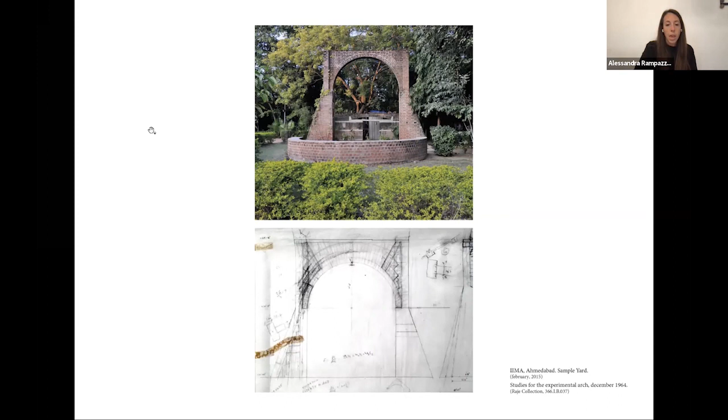The solution appeared to be found with the construction of the sample yard. That was not just an experimental arch—it was a sample yard, a sort of explanatory model of each part of the campus. What was established in its construction had to be followed in detail on site during the next stages. What's important to stress here is that the choice of a module, material, and the way of using it led to a vocabulary that was decisive for the identity and image of the campus that everybody knows today.

"Design demands that one understands the order," explained Khan. "When you're dealing or designing in brick, you must ask brick what it wants or what it can do." The experience of the sample yard was indeed a turning point in the design technique of the entire project.

The dimensional data of the elements of the project, in their most traditional form of proportions, disappeared from drawings in favor of indicating the number of courses or modular elements, the brick, and their exact position in the configuration. That was absolutely an operative strategy set up by Khan.

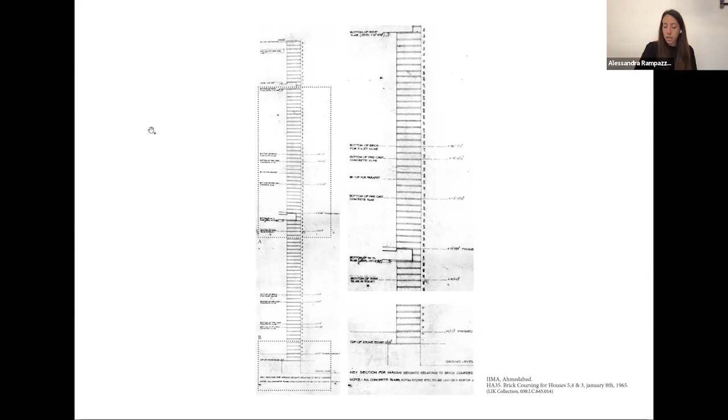And that confirmed his complete involvement in the project and consequently his awareness of the decisions taken on site. Construction continued following the indications received during December 1964 until 1969, when the IIMA board decided to reconsider the method adopted until then in order to speed up completion of the campus. This concluded the collaboration with the NID and its staff of architects, and a site office directed by Anant Raje was established directly inside the campus in one of the completed dorms.

Despite the same geographical distance that separated Khan from the construction site, the relationship already established with Raje, who had worked for 5 years in Philadelphia, was the base for a more relaxed collaboration. But because of the geometrical and volumetric characteristics, the new buildings of the main complex around the courtyard required further checks from a structural point of view.

"The core have large spans, are high, and have stretches of wall with large unsupported lengths and height," he said. For those reasons, it was necessary to structurally reinforce the walls to reach a monolithic behavior against the horizontal forces generated by an earthquake.

The third hypothesis proposed by the engineers relieved the masonry from its initial load-bearing role and transferred the loads to a reinforced concrete frame structure, which was then incorporated into the masonry. Even if Khan had adopted a similar solution in the Exeter Library, here in Ahmedabad he refused to combine two different building systems. He wanted to preserve the nature of the masonry as a structural element.

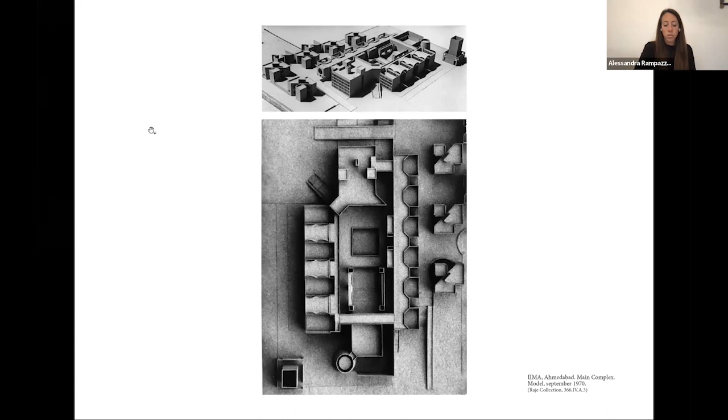So the only effective solution consisted in building a reinforced masonry, which meant inserting steel bars inside the brickwork. How to do it from a technical side was explored by Raje. He knew that this technique, already used in the Indian context, appeared completely alien to the honesty in the use of material stressed by Khan.

But despite that, he had to identify 5 different possible solutions, as you can see in the picture, from the quickest and most economic, in the upper left corner of the image, to the most coherent one, bottom right, which however would have introduced a further problem. The full exposure of the concrete frame used to underline the presence of the metal reinforcement would have significantly changed the external appearance of the brick wall, seen as masses until that stage.

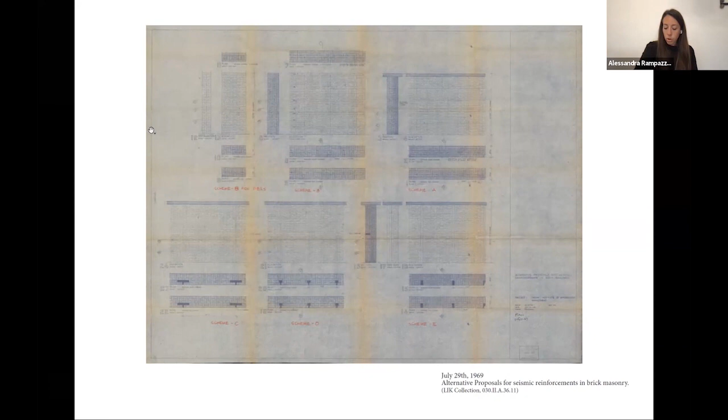According to Khan, technique, economics, and other circumstantial factors should have left space for architecture. Architecture should always come first. This was actually what had happened in Ahmedabad up to that moment, thanks to the trust and respect the Indian architects showed towards him. So it was totally unexpected that in his answer to Raje, Khan showed a new common sense, accepting the cheapest solution, even if less honest from an architectural point of view.

These sentences are actually crucial. I'm quoting: "Altogether, let me say that I'm practical enough to see the point of view that the effectiveness of the steel within the wall begins to look to me like straw or coir that reinforces old plaster. And I'm quite willing to give in to what would keep the job going without undue effort, because we are already so far behind the schedule."

What appears here as a passive acceptance of the most advantageous solution in terms of money, but especially time, needs to be traced back to the particular moment when this decision was taken. Also considering that in Dhaka, Khan had proven to know the more appropriate way of building reinforced masonry, the time delay needs to be taken into account, such as the inevitable pressure put by the IIMA as an institution on Khan's decision to endorse a simpler technical execution.

In the letter to Raje cited before, Khan accompanied the explanation with an explicit reference to tradition that appears as if he wanted to justify himself above all. "The effectiveness of the steel within the wall begins to look to me like straw or coir that reinforces old plaster," he said. According to this original interpretation, the masonry again became a combination of only two elements, the brick and the binder, with an added peculiarity.

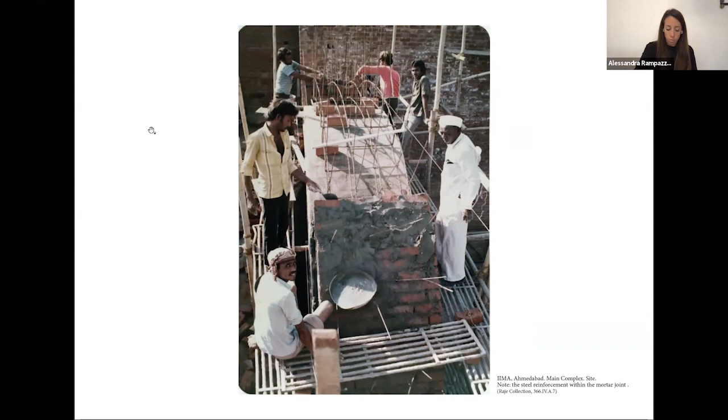As it was for bricks used as modules for the construction's control during the entire process, each technical choice related to the construction influenced the making of the Ahmedabad complex over time. But despite the proven constant awareness and control, visible and considerable effects of deterioration began to appear since the 90s, only 15 years after construction, showing the need for a premature restoration.

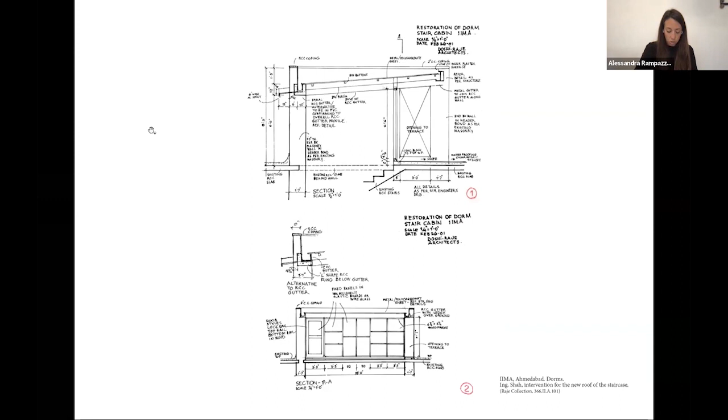Multiple factors can be stressed as causes of this bad result: the poor quality clay used to make bricks and their consequent high porosity, the limited protection offered by the mortar joint to the steel reinforcement, and above all, the choice to reinforce the masonry that way—altogether amounting to a recipe for disaster. And here I'm quoting Sanji, an architect of the NID.

The issue lies indeed within the construction itself and derives, as discussed before, from specific decisions taken during the process, which despite the geographical distance, Kahn was always aware of. This knowledge raises consideration on how priorities could be defined and which possible methods could be applied in order to preserve the essence—if we would ever be able to define this essence—of the IIMA buildings, allowing them to continue their history.